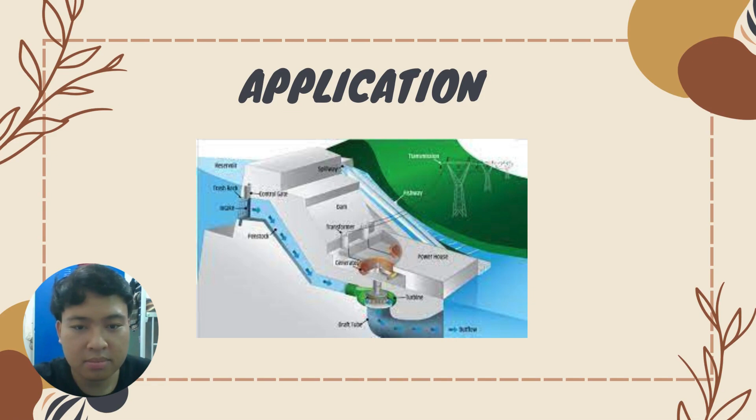My part is benefits to the community. There are a lot of benefits of hydroelectric power plants in Malaysia to the community. The first one is educational opportunities. Schools and universities may collaborate with the power plant for educational programs related to renewable energy, environmental conservation, and engineering. The second one is renewable energy generation. Communities can reduce their dependence on non-renewable energy.

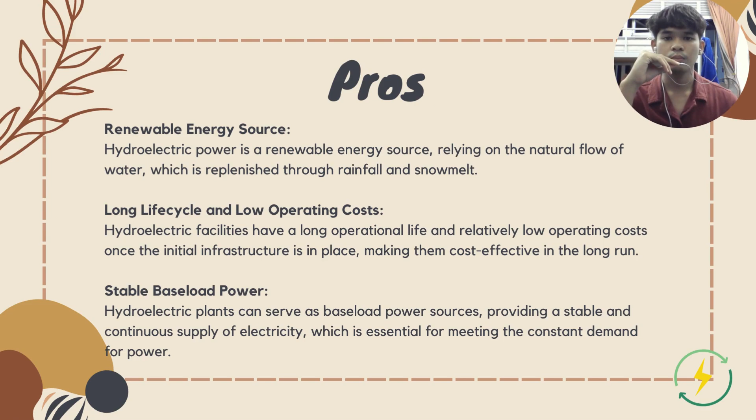The third one is job creation. The planning, construction and maintenance of a hydroelectric power plant in Malaysia will create a lot of job opportunities for the community. Okay, the second point is pros and cons. The first advantage of the hydroelectric power plant is it is a renewable energy source. Hydroelectric power is a renewable energy source relying on the natural flow of water, which is replenished through rainfall and snowmelt.

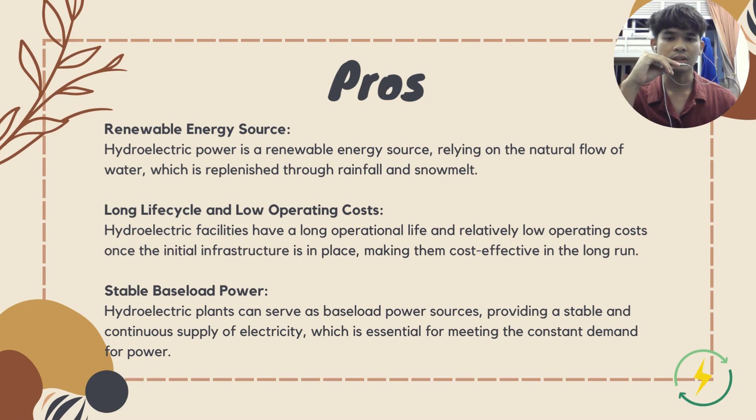The second one is long life cycle and low operating cost. Hydroelectric facilities have a long operational life with relatively low operating costs once the initial infrastructure is in place, making them cost effective in the long run. The third one is stable base load power. Hydroelectric plants can serve as a base load power source, providing a stable and continuous supply of electricity, which is essential for meeting the constant demand for power.

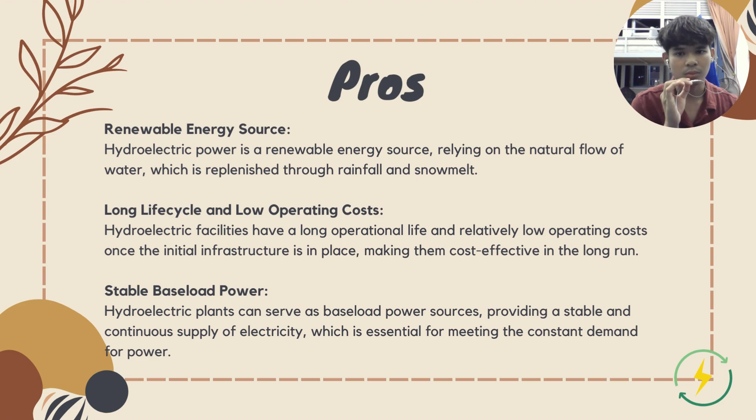And the disadvantages of hydroelectric power plants are environmental impact, ecosystem disruption, and geographic limitation. For environmental impact, the construction of dams and reservoirs for hydroelectric projects can lead to significant environmental impacts, including habitat disruption, altered water flow, and displacement of local communities. And the second one is ecosystem disruption.

The ecosystem of the river due to the construction of dams can disrupt aquatic habitat and migration patterns of fish, affecting biodiversity in the surrounding areas. So the third one is geography limitation. Hydroelectric power is dependent on suitable geographic conditions with access to flowing water, limiting its applicability to specific regions and countries.

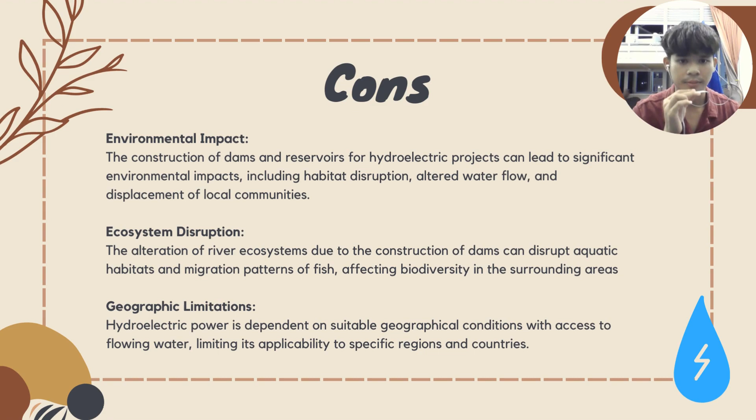So I want to continue about formulation and calculation. Okay, so for the formulation, power is the rate of producing energy. Power is measured in watts or kilowatts. Energy is what is used to do work and is measured in kilowatt hours or megawatt hours. In simple terms, the maximum hydropower output is entirely dependent on how much head and flow is available at the site. So a tiny micro hydro system might produce just 2 kilowatts, whereas a large utility scale hydro system could easily produce hundreds of megawatts.

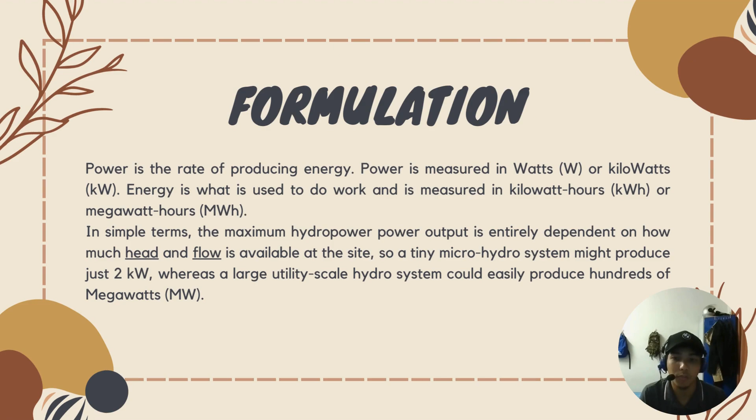Okay, so this is a formula to calculate for the dam. P equals M times g times H net times eta. P is power in watts, M is mass flow rate, g is gravity, 9.81, and eta is the product of all of the component efficiencies, which are normally the turbine, drive system and generator. And lastly, H net is the net head, the gross head physically measured at the site, less any head losses. To keep this simple, head losses can be assumed to be 10%. So H net equals H gross times 0.9.

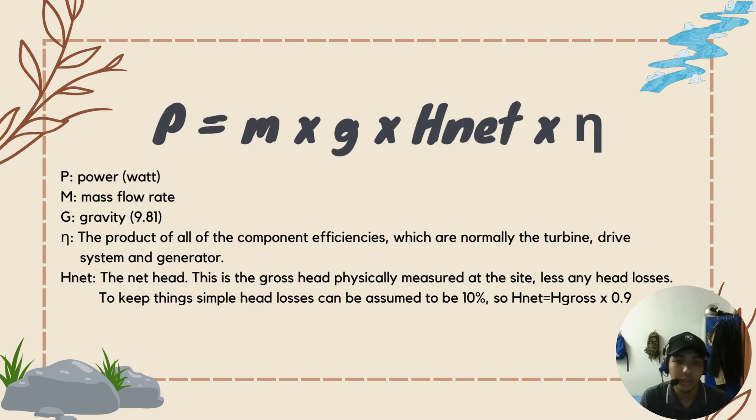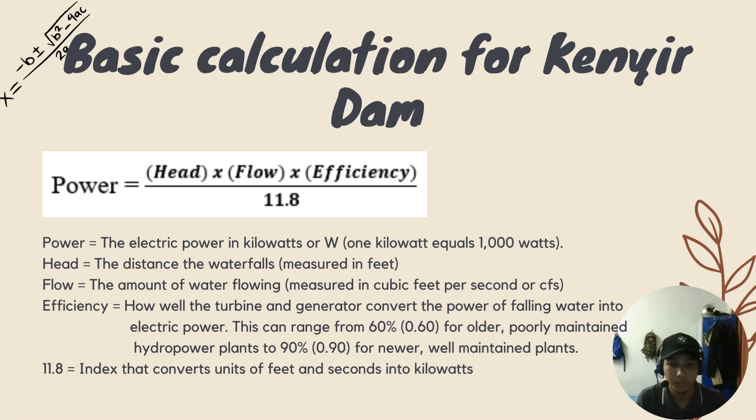So for the conclusion, hydroelectric power is a cornerstone of Malaysia's energy industry, crucial for achieving renewable energy capacity and reducing reliance on non-renewable sources. Initiatives like the Kenyir Dam exemplify Malaysia's commitment to a diverse energy portfolio. Addressing environmental concerns through analysis and sustainable practice aligns with national goals of energy security and global climate obligations.

Hydroelectric projects play a vital role in balancing energy needs with environmental sustainability. Malaysia's proactive approach in adopting new technology positions hydroelectric power as a key player in the transition to a cleaner, more sustainable energy future. Ongoing investment in research and development, along with conscientious project management, is poised to further enhance hydroelectric power's contribution to Malaysia's stable and environmentally friendly energy landscape.